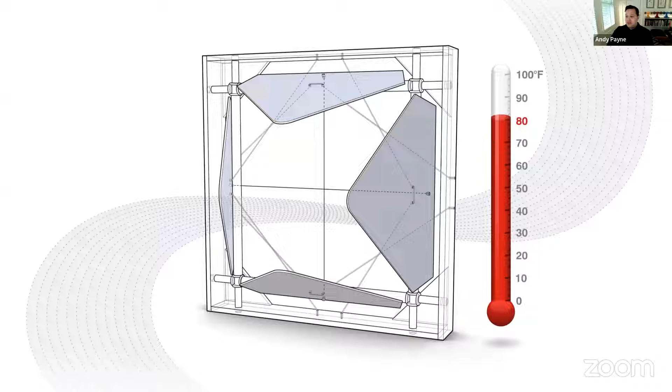So I set out to design and build something that could take advantage of this. What I ended up with was an architectural facade panel system that was completely energy independent, yet could open and close to allow for natural ventilation based on changes in thermal variations.

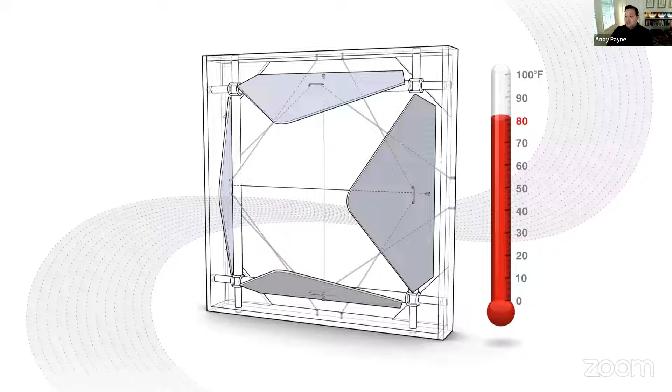As the surrounding temperature increased, the shape memory alloy wires would contract, causing the opposing panels to open up. Then when temperatures cooled back down, the shape memory alloy wires relaxed, allowing the elastic bands connected to each panel to pull them back into their closed position.

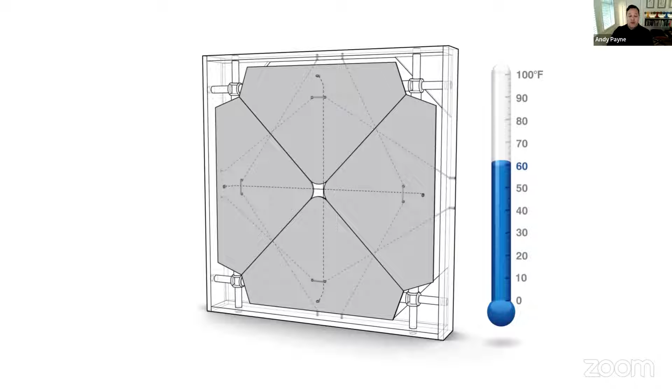To test my design, I built a physical prototype. I then used a heat gun to blow hot air into an enclosed chamber. As the hot air rose inside the chamber, it would heat up the shape memory alloy wires, which in turn opened the panel system. You'll notice there are no electrical wires or batteries. It's completely energy independent, relying solely on the natural material characteristics to drive the functional parameters of the facade system.

As I applied for a patent for this design, I began to explore different variations on the concept. Most applications which use higher temperature shape memory alloy wires use electricity to heat the wires up. But by using electricity to trigger the physical contraction of the wire, you could precisely control the opening and closing of the panel system based on any number of stimulus.

Using sensors, you could have the panels driven by changes in light, noise, or even the presence of people within a space. But building these physical prototypes was a time-consuming and increasingly expensive endeavor, so I started looking for ways in which I could speed up the design process.

And that's when I hit upon the idea of Firefly. Firefly is a Grasshopper plugin which connects physical input-output devices like sensors or actuators and microcontrollers to a digital 3D modeling environment like Rhino and Grasshopper.

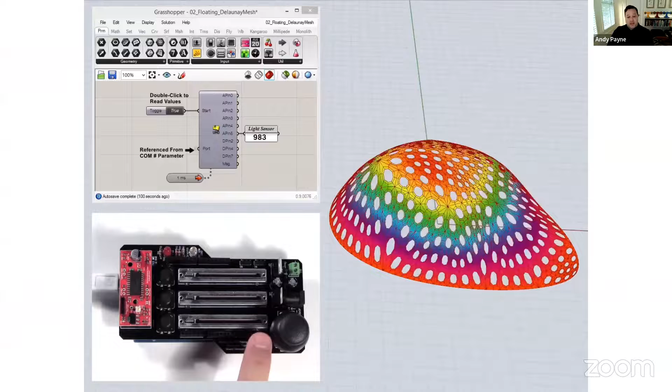Here you can see some simple examples where I'm using a sensor, a light sensor in this case, where I'm covering it up with my finger to drive a digital animation or simulation, where the light sensor controls the height field and a button controls the density of the perforations.

We could also use input parameters like sliders or Boolean toggles to drive physical actuators. In this case, I have two sliders that are controlling the rotation of two servos in a pan tilt servo configuration, where you see a digital simulation, but you also get the real world output.

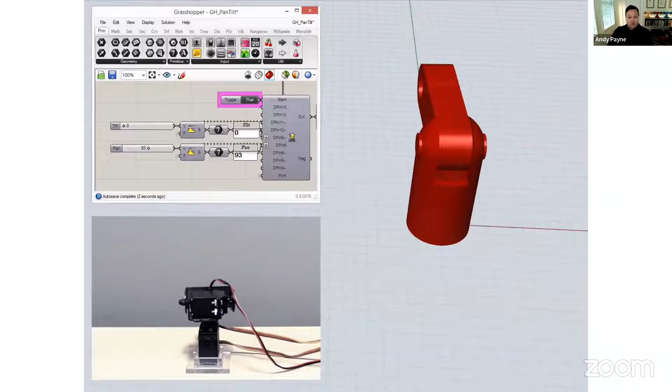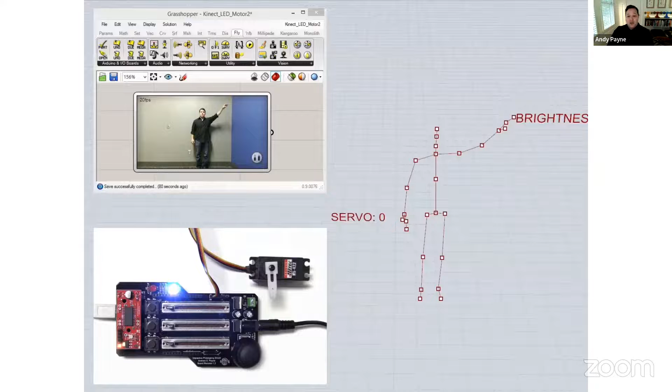Or in this case, using webcam or computer vision systems like the Microsoft Kinect, which we could then map the positions of our bodies to things that could control, like the brightness of an LED or the position of a servo motor.

And so these were just a couple of silly little demos to give you a brief glimpse of the types of things that you could do with Firefly.

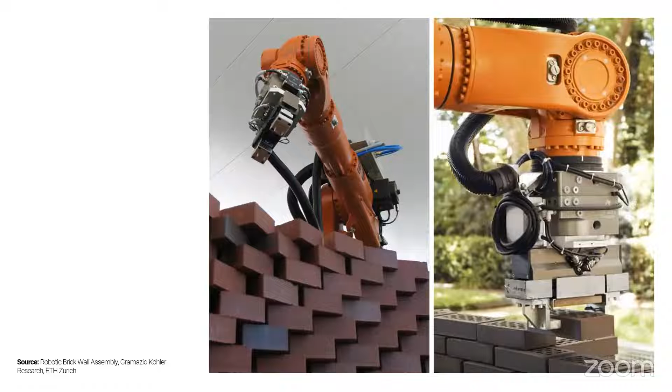But let's fast forward another year, and it's 2010, and I've just enrolled at the GSD to pursue my doctoral degree. It's my first semester at the GSD, and I'm enrolled in a robotic CAD/CAM class at the GSD and cross-enrolled in a class at the MIT Media Lab called How to Make Almost Anything.

Being a bit lazy and partially overwhelmed by being back in school after working at an architecture firm for 5 years, I thought I might be able to save some time by creating a single project which would satisfy the requirements for the final project in both of those classes. And the topic I chose to explore was robotic motion control, specifically for architects.

Over the last 10 to 15 years or so, we've seen increased usage of robotic manufacturing in architecture projects. And why not? They're incredibly versatile since you can attach various types of end effectors to the end of the robot, and they can be programmed to do many repetitive tasks with an accuracy that would be pretty difficult to replicate by human hands. Yet programming a robot is not an easy task, right?

It typically requires a great deal of training and domain expertise to do it correctly, which is why it's often done by a consultant. But if the consultant finds some sort of errors during the programming process, such as collision detection errors or reachability issues, then the design must be sent back to the architect and the process has to be started again. What I wanted to do was create an intuitive interface for architects to be able to control a robot, something as intuitive as one of the many drawing tools that architects have historically used to help them draw or design their own buildings.

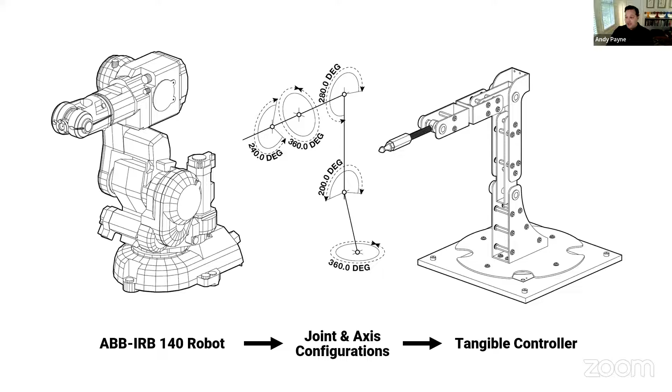But anyway, since I was part of this class called How to Make Almost Anything, all of the parts of the design had to be built by me. So here you can see the final design complete with water jet cut aluminum parts, high precision potentiometers to track the angle of rotation around each joint, and custom circuitry which will allow a user to start and stop the recording of a given sequence of movements.

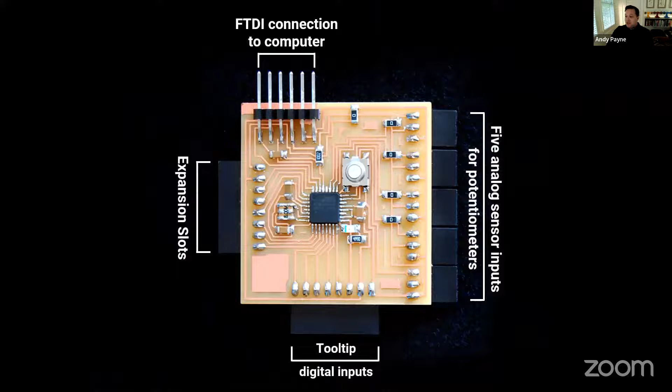As I said, as part of the final requirements, we had to build every aspect of the design. So I also had to build and program my own custom circuit board, and here you can see what is essentially the equivalent of a custom-made Arduino Uno. The microcontroller was programmed to read all of the sensors mounted to the controller and stream it to Grasshopper via Firefly to perform a digital simulation.

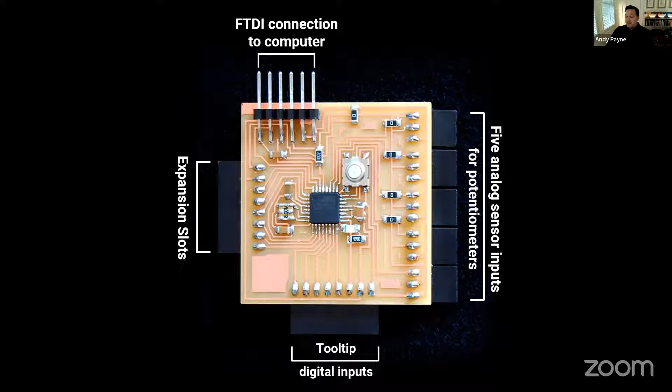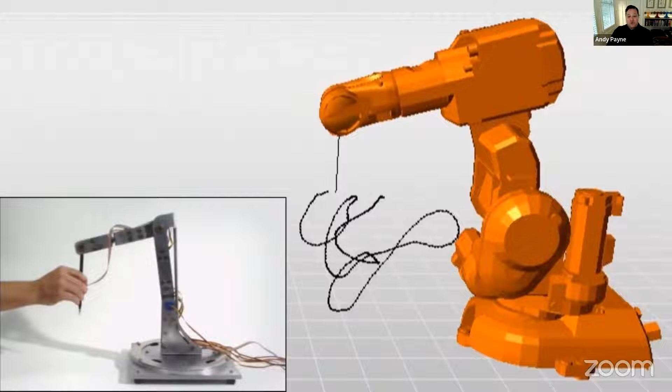So here you can see, as I move the tangible controller, the sensor data is fed into the computer, and I perform a forward kinematic solver to determine where the endpoint of the robot is. Once I know where the endpoint is, I can start to track that over time, and each point is recorded as part of the rapid code, which can be saved out and sent to the robot and replayed.

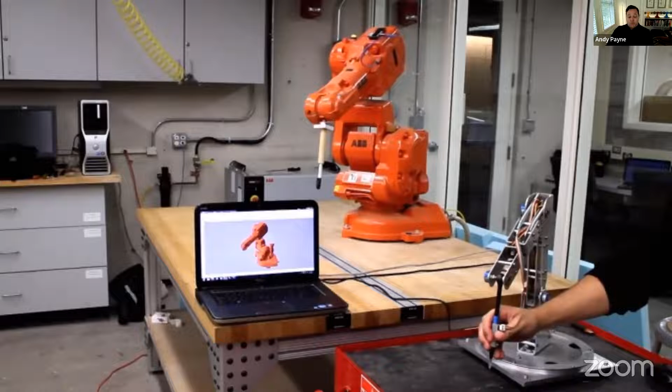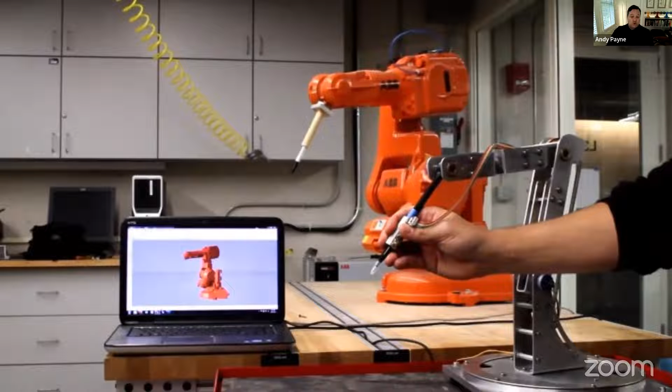But we took that a step further because I also wanted to be able to stream the live information directly to the robot. So you get a one-to-one interaction between moving the tangible controller and watching not only the digital simulation, but also the real world robot moving in the exact same way.

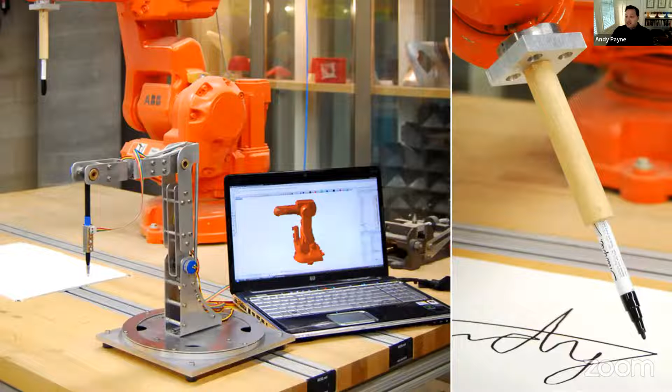So the result of the project culminated in me essentially attaching a pen to the end of the robot and having it mimic my movements as I wrote my name, which wasn't necessarily all that overwhelming. But I think the real success of the project came in the invention of a new workflow, which enabled architects greater accessibility and control over the robotic manufacturing process.

All right, so let's fast forward again another year. And I'm in my second year now of my doctoral degree. It's probably 2011, and I had just taught a workshop which was sponsored by Objet. Objet was a 3D printing company, which was later acquired by Stratasys, which had developed some amazingly sophisticated hardware capable of depositing various types of resins throughout the volume of a 3D printed part.

The resins used during the printing process could be combined to make vast arrays of material properties. The materials range from soft rubbers to hard plastics, clear materials to opaque materials, which could also contain any number of colors. Essentially, all of the material characteristics could be dialed in to enhance the aesthetic or performative quality of the 3D printed parts.

So after I taught the workshop, a member of the Objet team reached out to me to see if I would write a few posts for their blog. And in exchange, they would offer some free 3D printing services to explore the technology.

Now, my dissertation topic was not really focused on additive manufacturing, and unfortunately, I don't really have time here to present that body of work. Who knows, maybe Jose, we can schedule a follow-up where I talk about that in more detail. But I decided that if I was going to generate enough content to write about it on their blog, I really needed some help.

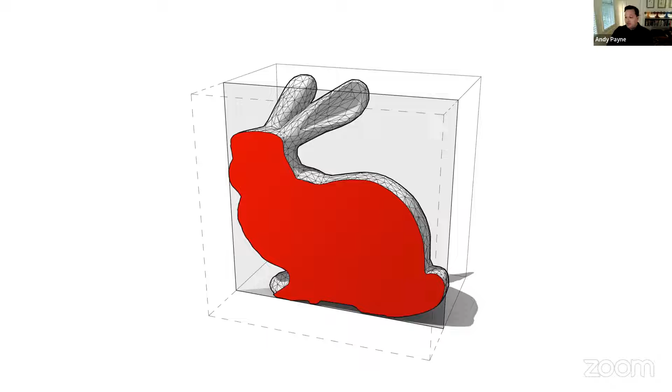As the hardware has become more sophisticated, and we have ways to manufacture parts whose material properties vary throughout its volume, we needed to rethink the underlying geometric representation we were using to define these objects. What we settled on was something called a voxel representation.

A voxel is just short for a volumetric pixel. In a voxel representation, we store a three-dimensional grid of cells where each cell can contain information about that location within the volume. Pixels, for example, contain channels, red, green, and blue, which describe the overall color of a point in a two-dimensional plane. For our voxel representation, we decided to create two channels, which would define a 3D object.

The shape channel defined the solid void relationship of the part. We used a level set operation to determine the surface boundary between the interior or exterior of the overall shape. And the material ratio channel used grayscale values to determine the blending of two materials.

Full black would represent 100% of one material, and full white would be 100% of the other material. Any grayscale value in between would represent a mixture of these two materials. Combining these two channels enabled us to define very precise volumetric distributions of material, specifically for multi-material 3D printing.

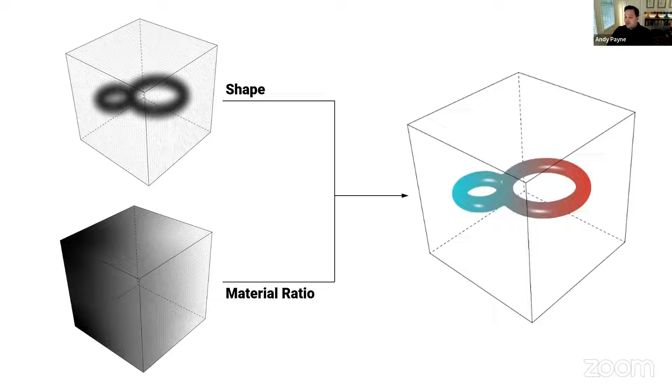So we set out to build a desktop application, which we called Monolith, which would allow us to describe these two different voxel channels to create 3D objects. The following is a series of clips which highlight some of the ways you could work with these voxel fields. For example, we had some methods which would allow you to paint within a 3D volume.

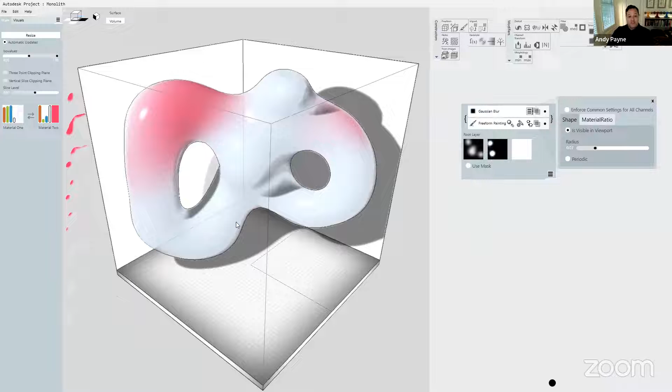Here you can see I'm painting in the shape channel, and it's using a signed distance field to offset from the brush stroke. Depending on which channel you're doing, you could either draw in the shape channel or the material ratio channel to alter the overall desired effect.

We could also create implicit surfaces using formulas, in this case, like a gyroid surface, by creating a series of equations which would control either the overall shape or the material ratio within the volume.

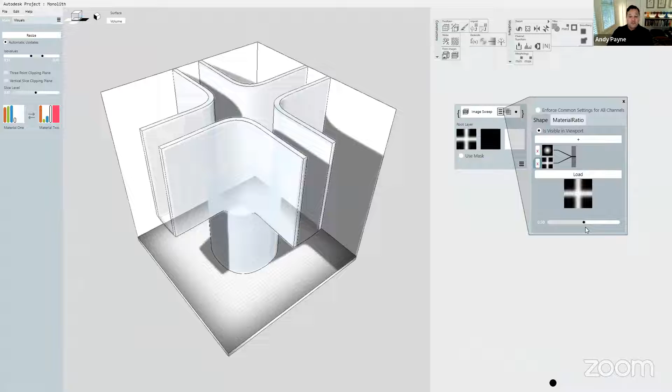We could also blend between, use images to loft a form together. The same way you would loft two shapes together, let's say in Rhino, two curves, in this case we're using 2D images to create that lofted shape.

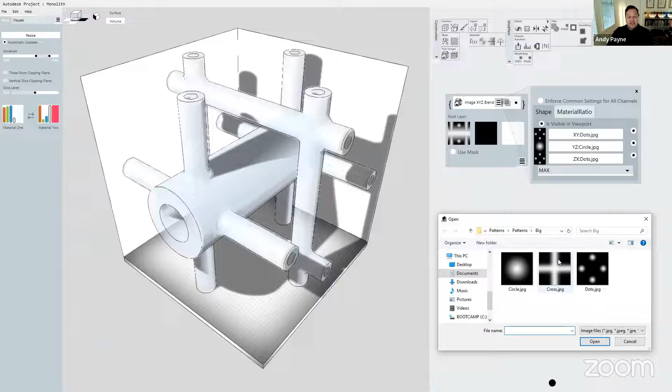Or we could extrude them in orthographic directions. Here we have some images that we're extruding in the XY, the YZ, or the ZX axis. It allows you to create really interesting forms very quickly by blending between these two different shapes.

As I mentioned, one of the benefits of voxel-based modeling is that unlike boundary representations, it lets us actually control the deposition of material within a volume.

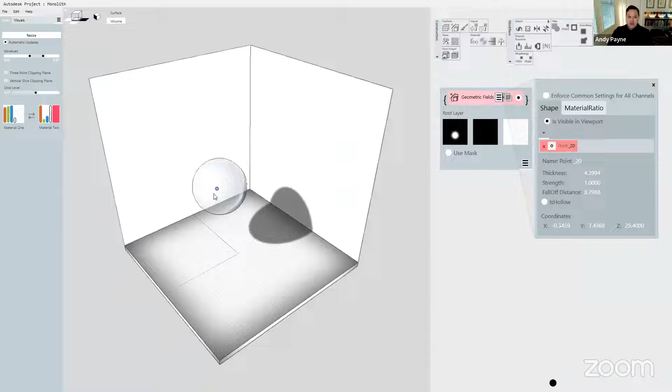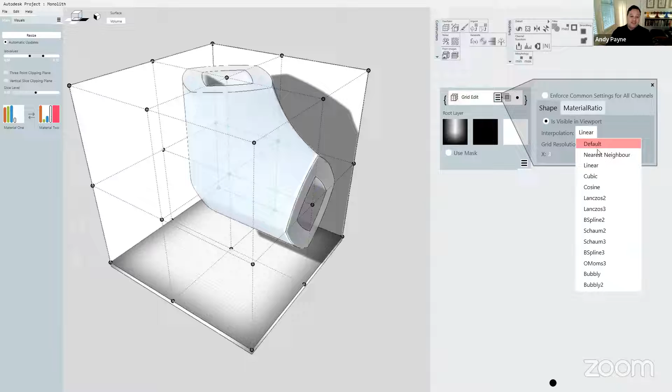We also had a tool which let us sculpt in a way where you could push and pull on points to create a sort of weight on that point. That weight would then control the overall shape of the object you were working on, or control the voxel field you were working with, whether it was the shape or the material ratio channel.

So there were a lot of different techniques that we began exploring for how we could work with these different voxel fields. We also created a Grasshopper plugin for Monolith.

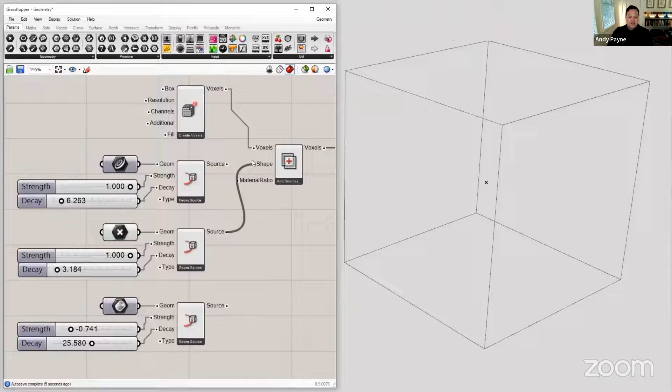One of the benefits of voxel-based modeling is that it can do Boolean operations very quickly. So here, depending on the strength, whether it's positive or negative, you're essentially performing Boolean operations on the voxel field, which would allow you to create really intricate Boolean operations.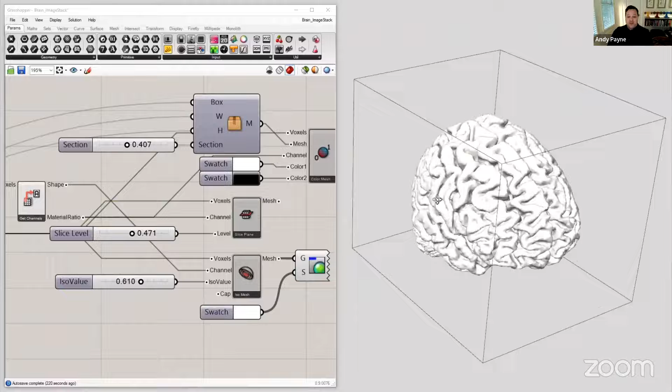We could take stacks of images, right? Since it's very close to a three-dimensional grid of pixels, we could create stacks of images. In this case, I'm using an MRI scan of my own brain to create a 3D reconstruction, just like in other MRI technologies.

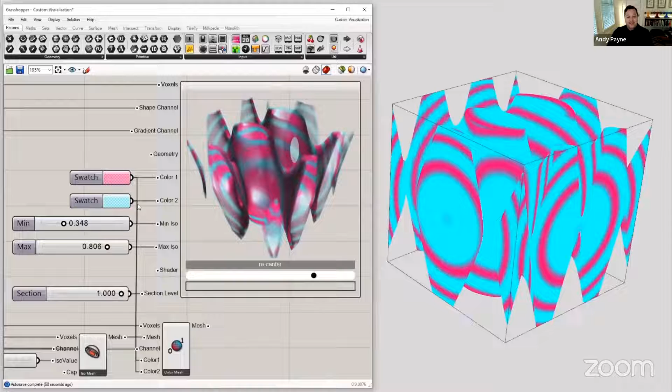One of the limitations in Rhino and most CAD software is that it's mesh-based, and meshes don't let you look inside the volume. So we created a special component that would allow us to visualize the volume.

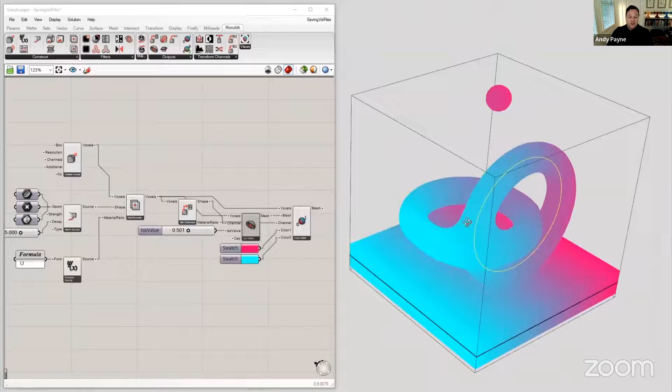We could also discretize a gradient into unique steps and output the mesh of each step to be 3D printed separately. Or, as I mentioned, you could create signed distance fields to create unique shapes and export that as a volume file.

That volume file could then be opened within the main Monolith application for further editing. So those were techniques we used to explore how to create different fields, whether that was the shape or the material ratio channel.

We also wanted to provide tools giving the user greater control over how the gradient between two materials combines within the part. We could use a dithering pattern for a smooth, continuous gradient, but we also wanted to apply a 2D or even 3D pattern to the gradient distribution, varying the density so the overall gradient effect is still maintained.

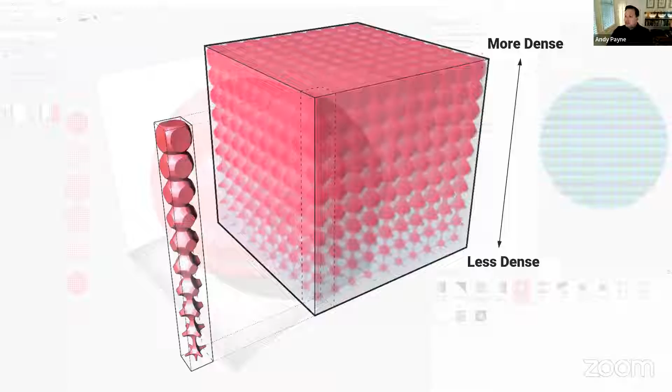There are obviously many different ways to apply these patterns. What's unique here is that we're using not just UV mapping, but UVW mapping, where W goes into the interior of the object.

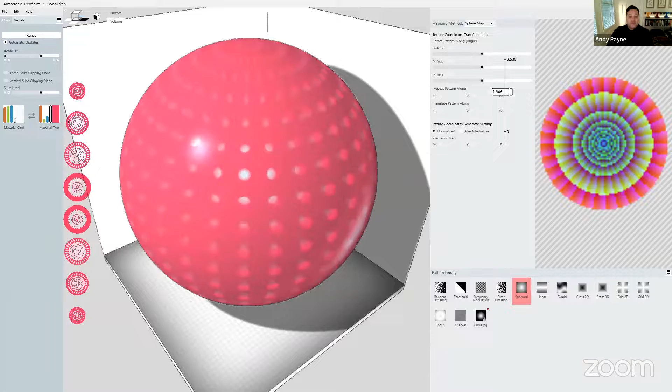We're applying different patterns in different ways. Right now we're simulating this using color, but remember that some of these parts could be printed with hard plastics and soft rubbers, so you could also generate unique effects that way.

Here you can create your own pattern. I'm creating a two-dimensional pattern of a cross, or a grid if you will, and then I can save that out as an image, which can be applied to the material gradient.

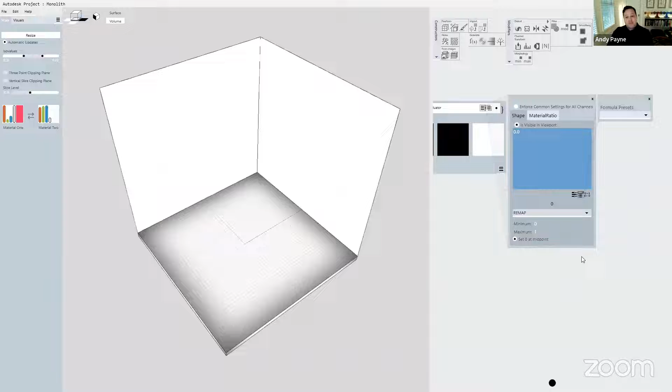I'm using a gyroid with a vertical gradient, but here I'm using the cross pattern, and depending on how I do the mapping, I can create really intricate grid patterns within the volume that still simulate the overall gradient effect.

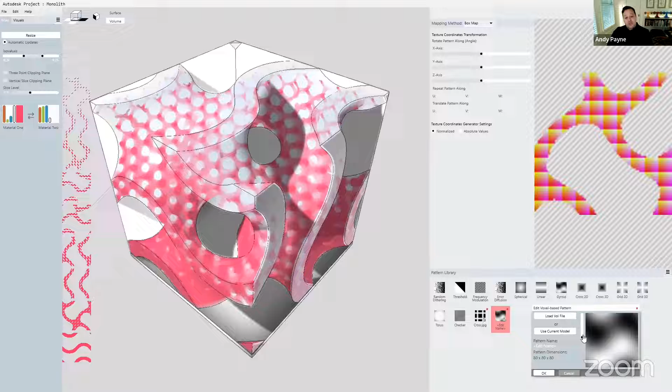I don't have to just use 2D patterns, I can use the model itself. Here I have a periodic gyroid that I'm using as the pattern, propagated on the interior at a mesoscopic scale to simulate that gradient. There were a lot of unique capabilities.

Another benefit of using a voxel representation is that there are a number of simulation algorithms that build upon voxel representations, and one of these is called topology optimization, a form finding process which tries to find the optimal shape given a load condition.

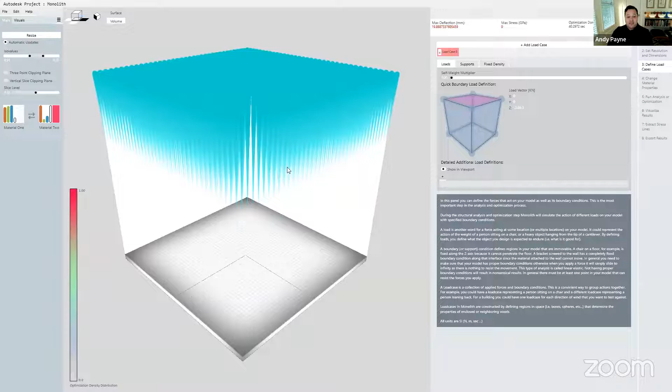We were also able to build in a structural analysis solver, a topology optimization solver, where here I have a load on top and 2 point supports. I then perform this structural simulation to find the optimal shape to support that load.

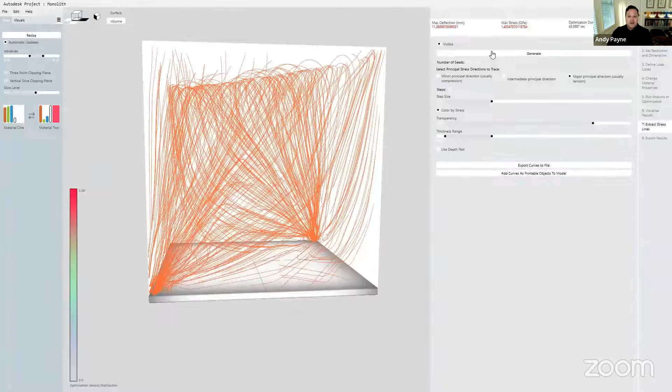We're able to visualize it in different ways, or even extract both the major and minor principal stress lines, which we could export as curves over to Rhino and then pipe, 3D print, or visualize in some other way. There were a lot of interesting avenues to explore using structural optimization.

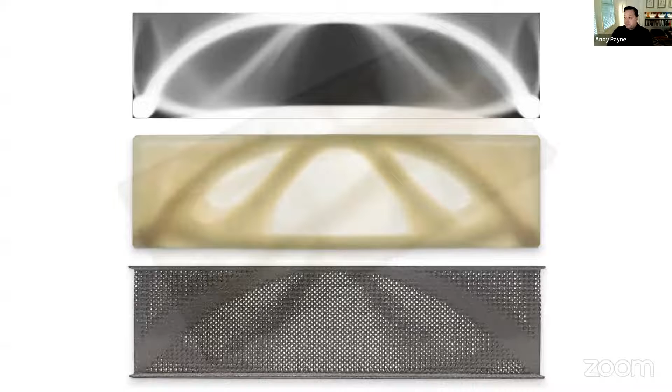Monolith was acquired by Autodesk back in 2015, and both Panagiotis and myself continued to work on the project for several years. Yet sadly, the project was shelved in 2017 and is no longer publicly available. Still, I learned a lot from this project, and parts of it still manifest in later projects I've worked on. All right, let's fast forward a couple of years now.

In fact, let's fast forward to two years ago this month when I joined Robert McNeel and Associates to work on parts of the Rhino and Grasshopper projects. One of the first projects I worked on, and one that I now lead, is called Rhino Compute.

If you're unfamiliar with this project, the basic definition is that it's a web server that can perform geometric calculations using Rhino's geometry library. That might just look like a jumble of words and jargon on a screen, so let's break it down a bit.

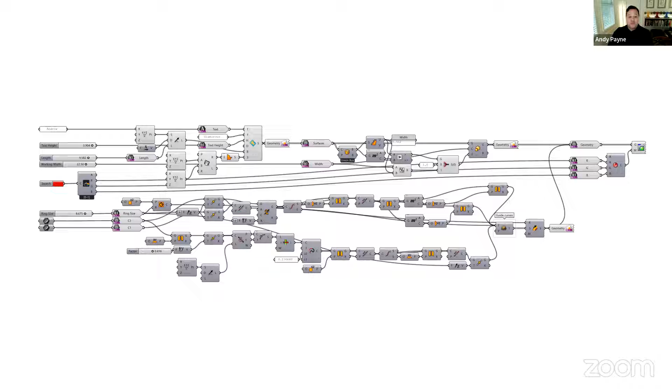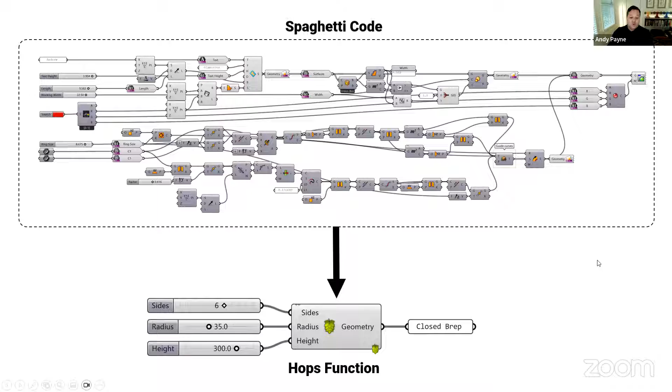So it lets you take something like this, which in many cases we'd call spaghetti code, and encapsulate it into a function which is then solved on Rhino Compute and returns the geometry. It encapsulates it into a much smaller, much more readable package, and cleans up your spaghetti code.

The way it's able to do this is that it has a certain number of types of components that you use, which define the inputs and outputs of the Hops component. These are called contextual components because they change depending on where they're being used. In this case, we have a number of components that let you define inputs, and a number of components that let you define outputs.

And then the middle, we have the body of the function, which can use standard Grasshopper components and really most third-party plugins to translate these input parameters into output values. So once you have the file or the function that you want, in this case I'm adding two numbers together to get a result, you can tell Hops to go find that Grasshopper file, and it will serialize that file and send it over to Rhino Compute.

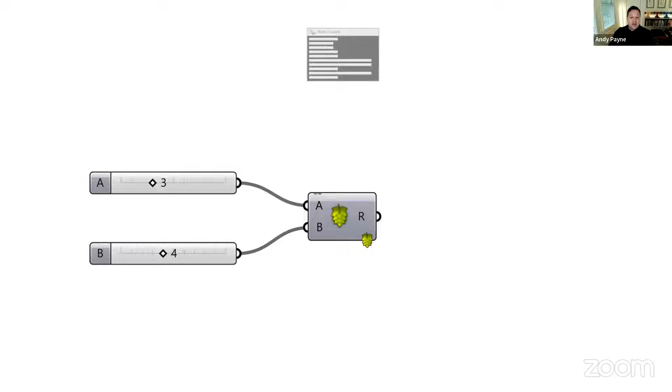Rhino Compute will interrogate the file and send back a response, which tells the component how to build out the inputs and outputs. By default, there are no inputs and outputs until you get that response. Now it knows, after it fed that definition using the contextual components, that I have two inputs called A and B and an output called R. Then once we assign it two values, it sends a second request over to Rhino Compute, which performs the calculation using those two values and gives you the end result.

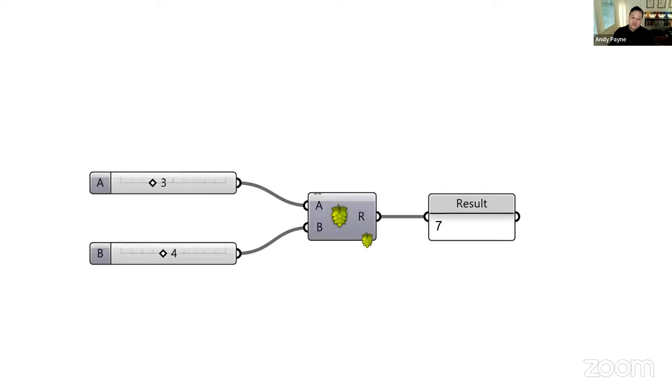So Hops is a really simple way to get started using Rhino Compute by building out these functions. But once you have these functions defined, here you can see it's a very simple example where we're creating, say, a metaball table, if you will.

You can take that same example and make a request to solve this using a web interface. So here we have a web interface that's sending a request each time a slider is moved on the screen. And that makes a call to Rhino Compute, which sends back the geometry that needs to be visualized in the web interface. So there's some really wide-ranging applications this could be applied to.

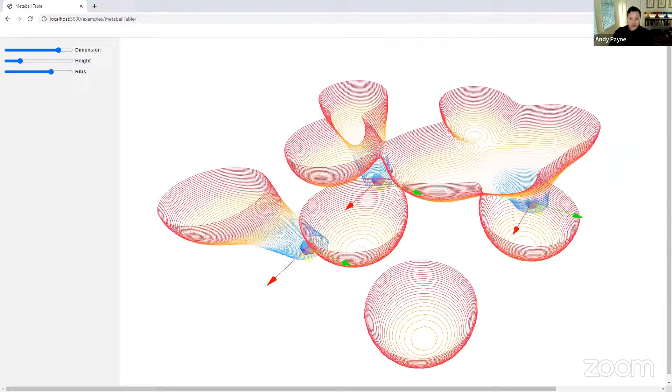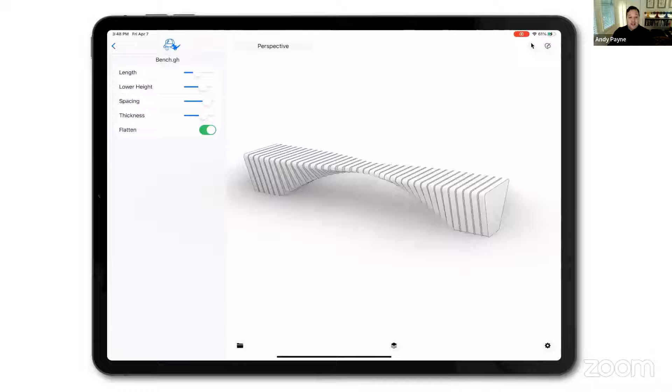We also have a new version of iRhino that's being developed internally from scratch. One of the things we've been exploring is that you could send web requests from iRhino, for example, to a Grasshopper definition which has a few parameters like length, spacing, and number of ribs, those sorts of things. But instead of solving this on the iPad, we can send a request with those input values and let Rhino Compute do the calculation, then send back the geometry, which is visualized in iRhino.

So there's a lot of potential, I think, that can be explored using Rhino Compute.

A second project that I've had the opportunity to work on since I joined McNeel is the further development of Grasshopper for Rhino 8. And you're probably asking yourself, why does Grasshopper even need further development? It seems to have probably hundreds of components, and maybe even hundreds of third-party plugin developers who develop components for it, which really give it almost all the functionality that could be required.

But as you start to use Grasshopper, you may notice there are still a few gaps in what it can do. For example, Grasshopper really has no concept of a Rhino layer, or for that matter, a Rhino material or annotations. There are some basic annotation components in Rhino 7, but they don't really use the native annotation objects that are native to Rhino. And similarly for blocks, there really has been no ability to create or manipulate blocks.

So there are these gaps that exist in the current component set that we really wanted to address in Rhino 8. At Rhino 8 beta, which is now available, if you have a Rhino 7 license, you can download Rhino 8 beta for free and try it out. Grasshopper for Rhino 8 now has over 100 new components to fill in some of these gaps, and these are just some of the examples.

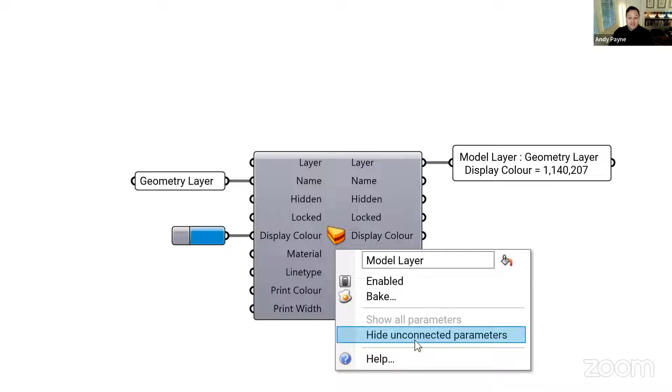What I wanted to highlight is that all these pass-through components have the ability to hide or show parameters that are not being used. You can see there are a number of inputs I'm not really concerned with, whether it's visibility, material, or line type. In this case, I just want a layer and the display color. So I can say hide unconnected parameters, and I get a minified version of that component, which hides all the parameters I wasn't necessarily using.

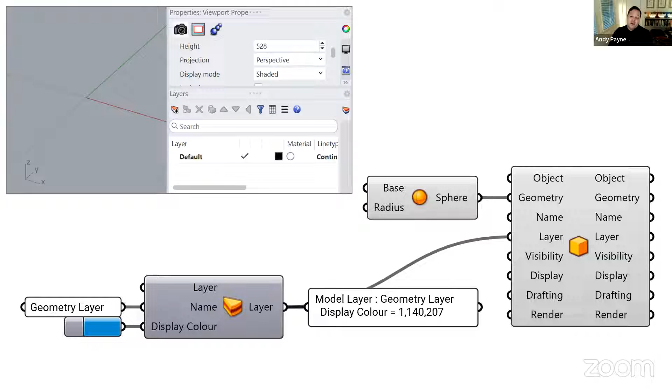I want to stop here and highlight the component on the right, the model object attributes component. That's how we begin to assign different attributes to geometric objects. In this case, I have a sphere defined as geometry, and I want to assign that sphere to be on a different layer, this new layer I just created.

Now, if I right click and bake, it will bake the sphere into the Rhino viewport. When I click on it, you can see in the layer panel I have a new layer called geometry layer, and it's also assigned that layer to the object, with the display color using it by layer because I've defined that. So really, this model object attributes component opens up a lot of new possibilities.

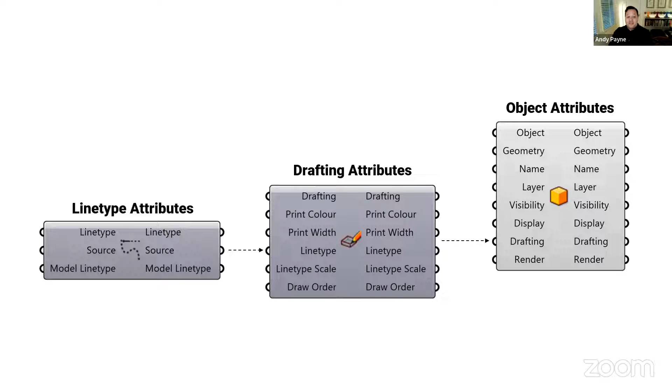First, if we look closely, it lets you decide what geometry you want to assign the attributes to. We can set the name of that particular object. Each of these have layer attributes, so what layer do you want the object to be on. The visibility attributes can be defined. We have display attributes, and each of these inputs have their own attributes. We have drafting attributes like print color, print width, and line type. So all of these things can now be explored and assigned to any of your geometry, which opens up a lot of new possibilities that weren't previously available.

Okay, so we've talked about that. We also wanted to add a bunch of new components that deal with annotations.

Like I mentioned, we've had some rudimentary annotations available in Grasshopper, but now we have the full set that are available in Rhino, all exposed within Grasshopper.

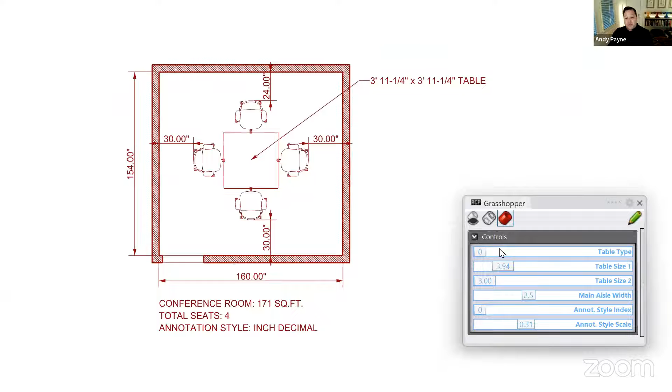So you can create text entities, linear dimensions, radial dimensions, you name it. We also can create annotation styles or dimension styles. All of the stuff that you can control within Rhino annotation styles can now also be controlled in Grasshopper. So you have the ability to create parametric models that are fully dimensioned, used as more than just geometric objects. We're now creating and controlling annotations and controlling how a drawing looks.

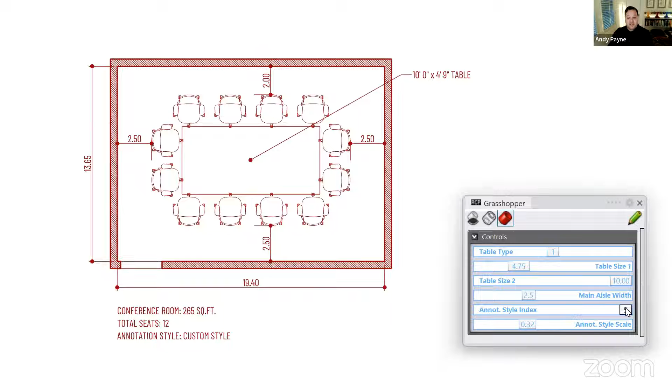Here, I'm scrolling through and changing the different annotation styles that are stored in the document, so I can quickly begin to look at how different annotation styles look as well.

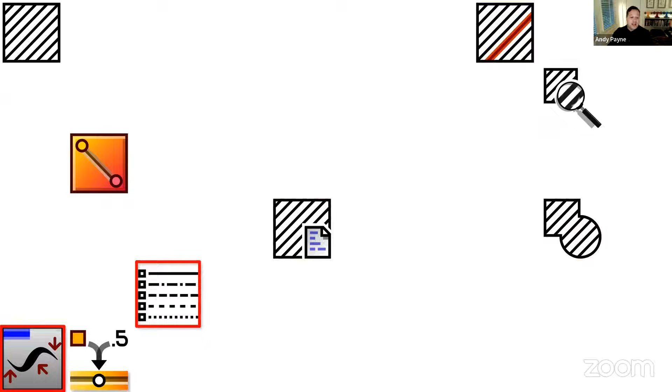We also wanted to add a few components that deal with hatches as well as line types, and I'll cover those in a little bit more detail.

Hatches have been a little bit tricky to deal with in Grasshopper, but we have a number of new components that let you define not only hatch patterns, but how those hatch patterns get applied to a specific hatch, for example. Here I've got a little 3D widget that I created, which is simply allowing 2 points

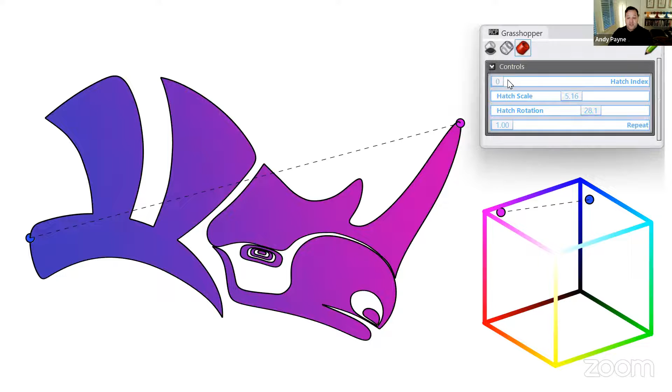to be moved within a space, which is controlling the color of the gradient that you're using. And then I'm also just querying the document for different hatches that are available and quickly moving through to see which hatch looks the best on my object.

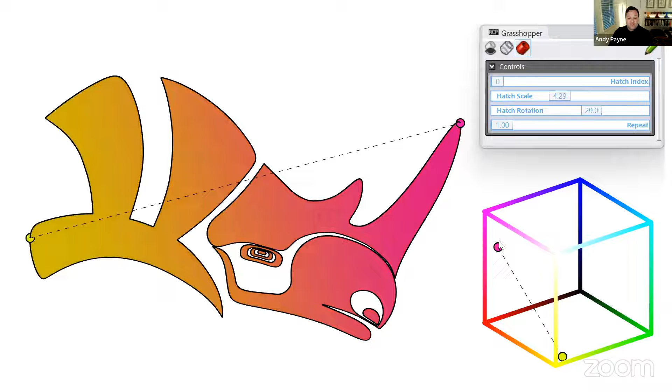So there's a lot of new fine-grained control that you have over hatch objects in Rhino 8.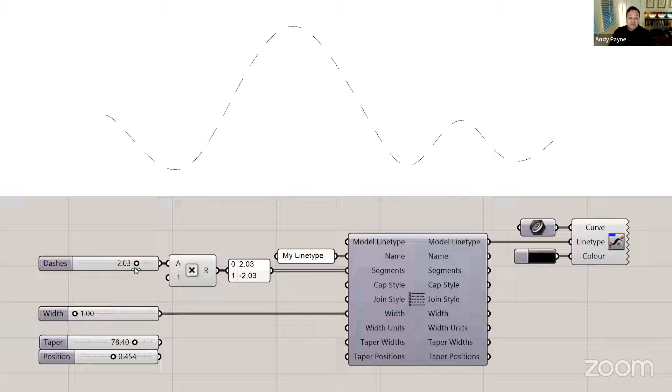If you've also used Grasshopper, you may or may not have been frustrated by the line type visualization. It's very difficult to create different types of line types for Grasshopper, but now we have the ability to not only create thicker lines, but we can taper lines using different sliders, or create dash lines on the fly. All of this is parametrically controlled, the same way you would control any different object.

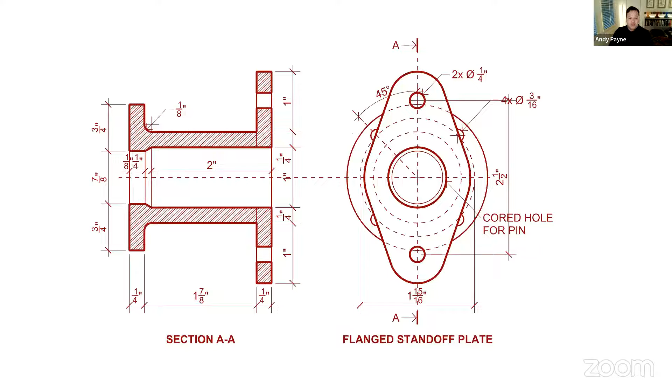So there's a lot of neat and interesting ways that you can start to explore and create different graphical styles now within Grasshopper. And what that lets you do is create things like this. This is a fully parametric Grasshopper model, which is completely driven within the Grasshopper preview.

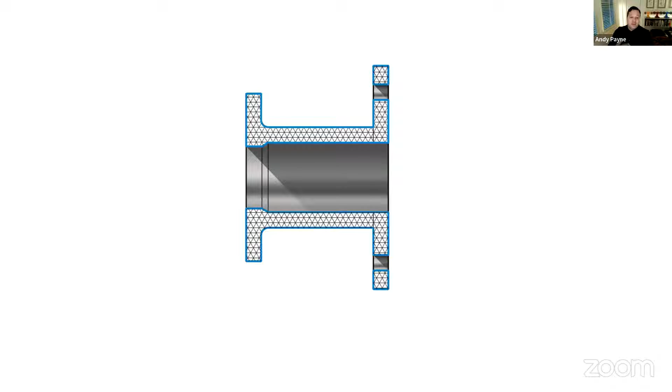What I mean by that is you're not baking anything. Everything you see here is being visualized directly through Grasshopper, including the shadows that you see. Those are the shadows, or the hatches that you're seeing, all done using the hatch objects and things like that. So now you can create really fully beautiful drawings or previews just using Grasshopper geometry or Grasshopper methods, and you have full control over that.

Then, as I'll talk a little bit about baking, you have the ability to start to bake those back into the Rhino document.

All right, so lastly, I got two more topics and then I'll try to wrap it up. We wanted to provide, there really has been no ability to control blocks from Rhino in a Grasshopper definition.

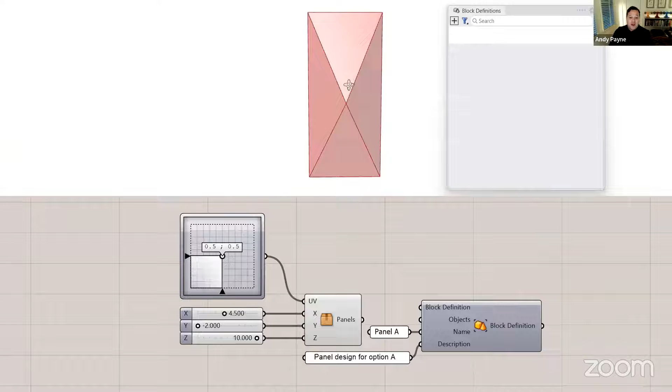And so now we have the ability to not only create block definitions, but then assign those block definitions to block instances, for example. So here I've just got some geometry. It doesn't matter what the geometry is particularly in this case, but this is a panel system that I want to create a block for.

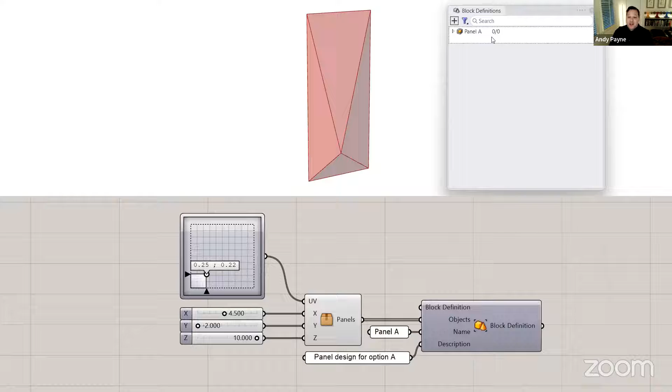So I have this new component on the far right that, when I bake it, adds a new block definition to our Rhino model. And if I then move or change that geometry and rebake the block definition, it doesn't add a copy, it simply updates the existing block definition.

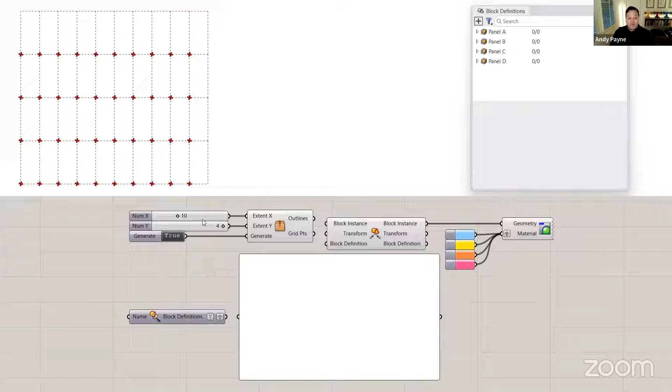Or let's say now I have 4 different block definitions for A, B, C, and D in my Rhino model, and I want to create a series of instances of those definitions. I can now do that directly through Grasshopper. So first I query the document to get access to all of the 4 definitions that currently exist. And now I can create instances of those, using a very simple algorithm that can simply randomly generate these different block instances.

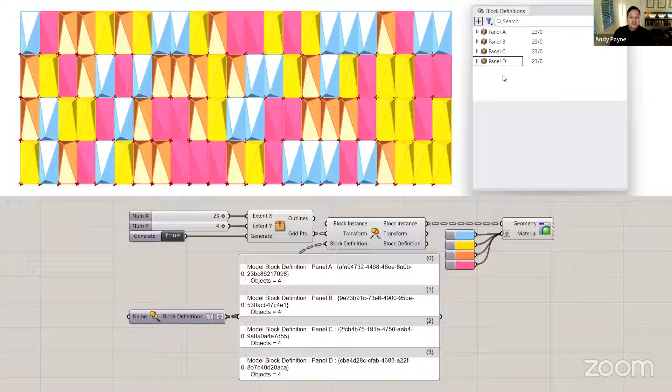And when I'm happy with the design, I can then bake those, and now each of those block definitions becomes block instances. So there's 23 different block instances in this particular design.

So blocks have seen a lot of care and update. Lastly, I'll close with this new idea of baking. Grasshopper has really been limited in the past in its ability to bake.

I've already shown the primary way most users use it is to right-click on a component and select bake. That's about the most you could do. You had a few attributes you could control.

But what we decided to do was write a new bake component, which I think is really versatile and powerful. It has a single input, which lets you pass in any content I've just shown, or any supported data type. So you can bake layers, annotation styles, line types, including geometry.

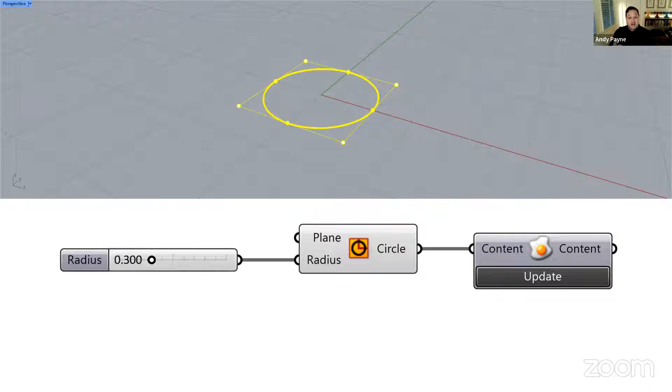Let's take a look at a quick example. Let's say we wanted to bake a circle into our scene. We simply pass the circle in there, click the update button, and now we have a circle available in our Rhino document. If I decide to move the slider, I can manually click the update button and we have a new baked piece of geometry that is a smaller circle in this example.

But there's this one instance where we can zoom in on the interface and click on the plus button, which lets us add a second input, now letting us control the baking using a Boolean input. Now, every time we move our slider, we have updated content. So every time the solution is calculated, we are also baking the content directly into our Rhino document.

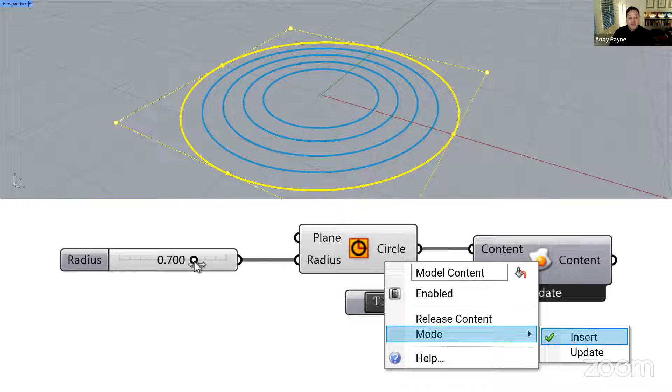I want to highlight that there are two different modes this baker can operate in. The first mode is what we call insert mode. Insert mode is exactly how Rhino or Grasshopper currently bakes geometry into your definition, meaning every time you bake it, it adds a copy of that geometry into your definition. So here, if it's in insert mode and I move my slider, you can see I get a copy at each step added to the document.

However, there's a second mode called update. When update is involved, it's trying to keep track of the geometry you're working on. So any change you made, it's not making a copy, it's looking for that specific piece of geometry or data type and only updating the attributes that have modified on that particular data type.

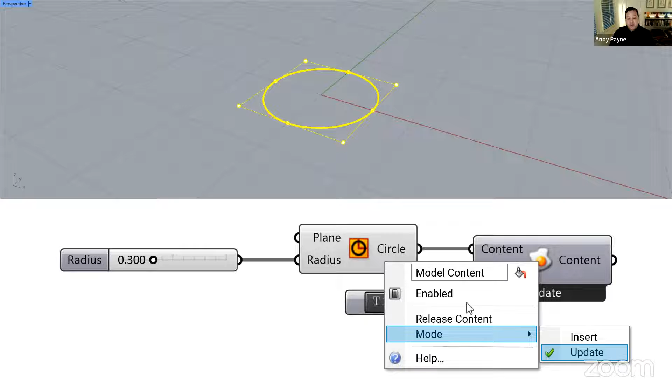Let's say we want to bake an option into our scene, we can then release the content, meaning it's no longer being tracked. And now when we make our changes, it's tracking the newly created object we just created. So the baker is really powerful and I think has a lot of potential to enhance your workflow as you work through these things.

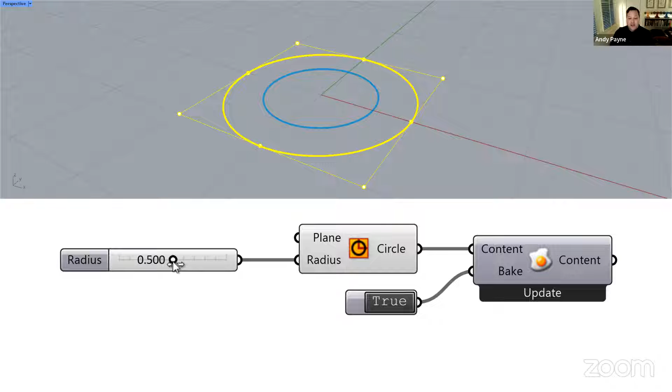So if you're interested, I would highly encourage you to check out the new Rhino 8 beta, which is publicly available. If you have a Rhino 7 license, you can download Rhino 8 beta for free and check out the Rhino tab, where all of these new components live. I don't know where I stand on time, but I think I'm about done and we can open it up to Q&A.

Fantastic. Ooh. Thanks a lot, Andy.

My mind is blown with the 2D drawing with the rendering directly from Grasshopper. That is just so cool. It was about time. All right, beautiful.